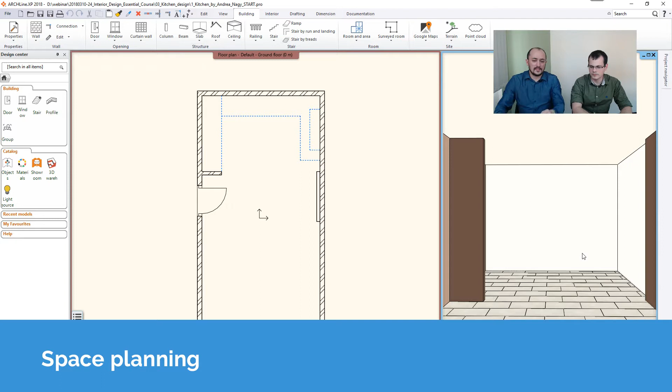What you have in front of you now is the 2D and the 3D developing continuously. Whenever I change the 2D, I will see what happens in the 3D, and I can swap the two drawings by simply clicking here, and they switch sides. If I click to the 2D and use the same button here, I can switch sides again. Sometimes I will use the full screen, which is by default this button here, and this way I can go back to the previous view.

And there's a shortcut for that which works just as fine. It's F2, and that allows you to go back and forth between the full screen view and the split screen view. So these are the things that I will use besides the regular zoom in, zoom out, and of course panning the content.

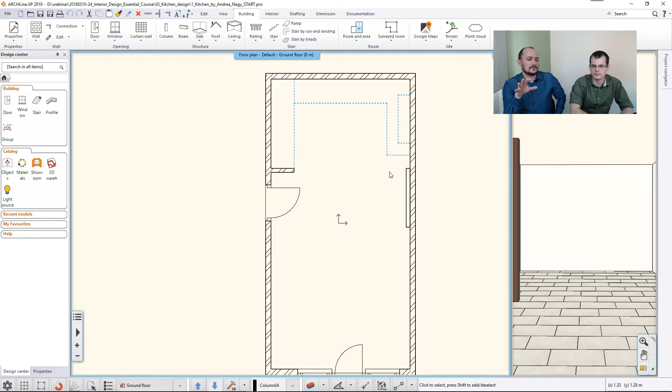So what do we do now? This content already has a few guidelines here. These guidelines will help us. They are not necessary at all. They are just visual clues for us to see where we will work, these blue lines. So I will start creating these furniture units here in this row, and then we will expand this content. If you have Archline and you can see the interior ribbon, that's where you will find all these tools.

Creating a unit is via this KBB menu, and this allows you to create a cabinet. This cabinet is basically a base unit, but you can customize it and change it to anything else. The software also comes with a built-in library of items. This is not the full list, just a quick list of items. You can find something here, pick it up and customize it. Sometimes that's the quickest way of creating something. But there's another way around, and this is where I will start now.

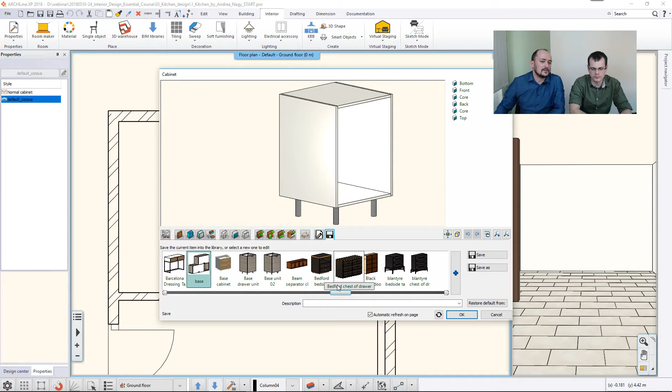In that case, Archline generates a dummy, which is a starter set of a cabinet. And then you go to the first page, and this is actually a tray of possibilities that we will use during our session. Pretty similar to the room maker, what we used in lesson one. Yes, that's right. So you can go through these things. You don't have to set up everything here. You will always focus on the one that's necessary for the current furniture.

Let's go through the basic settings. First things first, of course, you need to set up the width, the depth, and the total height of this furniture. These dashed lines are helpers to understand how that measurement, that width and depth, changes the item. If you change the depth, for example, see I'm changing it to 0.55. I'm working in meters, but you can change it to anything else.

So if I change that and I click on update, the software updates the size, and now it's a little bit more shallow, and it's always from this point to this point. So it's the depth of the unit itself without the door. Yes. The door, based on our setting, will either extend the size or will not change the size of the full furniture, but that's a decision we will make when we add the door. It's a later session.

So now we set up the width, the depth. We also set up the total height. I think this should be 0.85. You can change the carcass height as well, and you can change the space for legs. Even if you don't have real visual legs, it's advised to set this up. Later we can make these disappear if it's a wall mount base unit, and still we need that because the space will be used as a gap.

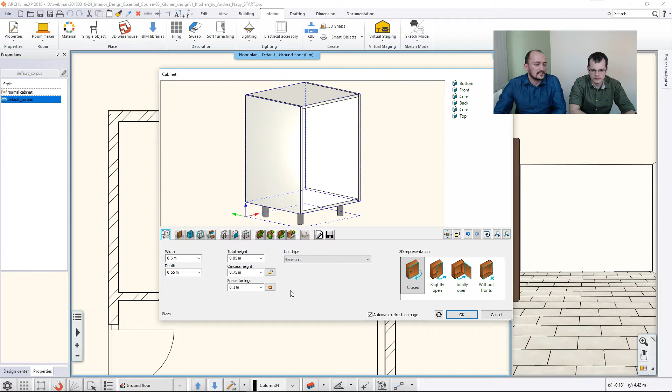Now, this lock is also something that I should talk about. It's locking the space for legs. That means later when you place this item on the drawing, you are able to stretch it sideways, backwards and forth, and you can even change its height. So if the leg height is fixed, then if you change the full height of the unit, only the top part will be changed. The legs won't stretch; they will keep their height. It's not that the whole model is going to be stretched. The leg is going to stay the same proportion as it is.

So if the plinth size, the decoration gap size, is the most important for you, then you can lock it. At this phase you can say, okay, this is what I will have to keep because all my units have to share the same leg height. Or if it's the other way around, if it's some sort of furniture where the unit size is the most important, then the leg can be stretched, then you can unlock this. But by default, we keep this locked.

This is the unit type. It's also important for two reasons. One reason is at the end, when we are finished with this kitchen design, we will make a quantity takeoff listing, an Excel file, a schedule. And in this schedule, the software will collect units into groups based on this setting. So base units will be in a group and wall units and so on. So this will be kind of a helper to digest that data.

And on the other hand, when I'm placing the units on the ground floor of this floor plan, which you will see pretty soon, the software will listen to the unit type. It will check whether two units which I'm placing close to each other are the same unit. Are they sharing the same height? And if so, then it's matching them, how to snap them together. So it won't let them overlap each other. They recognize the boundaries of each other. Yeah, it's easier to work accurately. Yes. So I keep it as base unit, and then I go on.

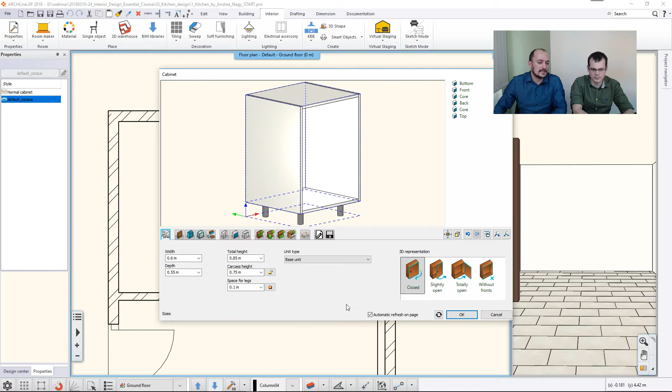These values, we will work with them later, but it just makes no sense yet because there's no door to open. So we will come back to this place later. There's the second page, which is about the unit front. Now, in case of designing this kitchen, I will use this unit family.

You can actually design your own unit fronts or own unit families. These are sets of items that the software will automatically select when you decide to have a front, whether it's a door, a shelf, or a drawer front. So in that case, the software will use this front. In our case, it will be this brown item.

And also here you can set up what sort of handle you would like to see at the front of this unit. This is also a library built in the software. So if you go there and you go to the libraries and you type handle, let's see what sort of handles we have here. These are the built-in handles in Archline.

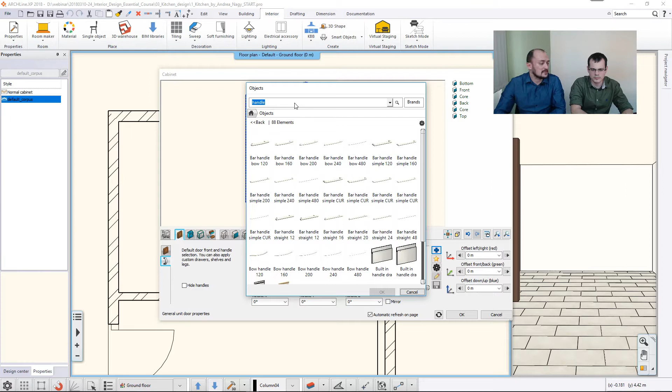And also if you download objects, you can use those objects, and you can actually design objects. There are many tools, for example, the loft, the decoration profile, stretch profiles and rotational solids. Create your own. Yes, which allows you to model your own things, or you can just download an object, explode that object, take one handle out of it and then just throw the rest if that's your intention. So this library here allows me to select something.

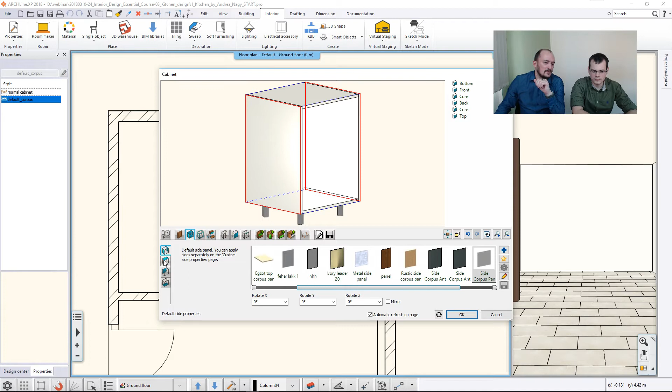I think I'll go with this, and the third page, this is where you determine how the unit anatomy is in action. Now the side panels are actually white panels, which in my case is just fine. But if I would like to distinguish the top panel for any reason, because for example on top of this we will use a worktop. So you don't need the top of this. Yeah, and I don't need the top of it. At least I don't need a full plate here. It's just a waste of money to use that.

So I just disable this option here because I don't want to clone the settings of the side panel. So instead of cloning it, I disable it, and then I can determine a custom panel. And this is the top corpus panel. This is something that the software offers by default, and then you can just say you would like to use anything else. The same happens if you set up the back panel.

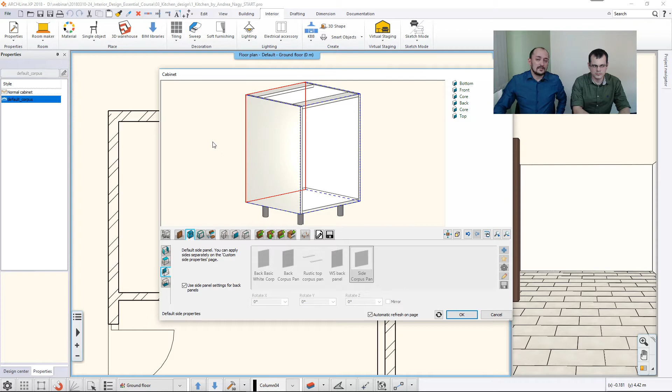The back panel, again, in this case, if you click here inside and click and drag the content, you can just rotate this model. And as you can see now, if it's not a freestanding unit, it could be a waste of money to use this thick panel. You could use another kind, maybe a thinner, cheaper panel, or you can just skip this panel at all. So you can say that you don't want to see anything.

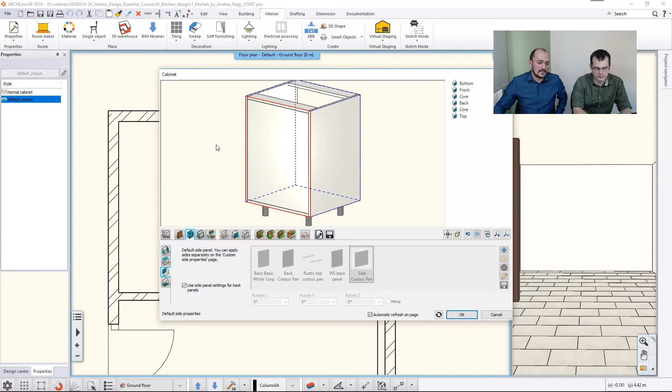Now again, I just disable this option. I don't want to clone the side panels. Instead of that, I would like to use a basic back panel or something else that I'm about to design now. So, okay, the bottom plate is fine, and everything else is set up. So now we will quickly jump to the doors. Later I will describe all these as well. Let's jump to the doors now, and I would like to add a door.

In case of adding a door, you can decide the door layout. You can set the door overlay, whether it's full overlay or traditional. And also the software highlights the area where the door is going to be added. Now if you add a door with the current settings, then it would adapt to the overall dimensions of the cabinet, right? Yes, so if I'm doing that, then it's covering the whole unit. I will show you soon how you can make this different, but for now I think it's enough. Let's see what else we can do with this.

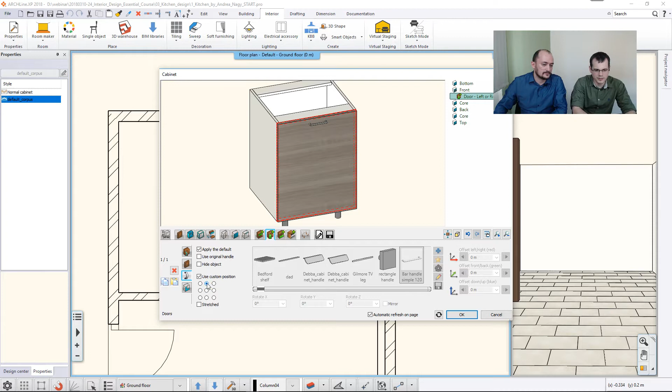I think I would like to change the position of this handle from the side to the top. As you can see, these are sub-pages of this page. The door setting page has 4 sub-pages, and one of the sub-pages is about the handle itself. And also you can just select another handle, which in a complex unit would be meaningful. But now I just would like to use a custom position. Instead of this default position, I would like to use this here. And in the middle. That's right. Or anything else I can select from here.

And let's say I'm satisfied with this, and at the end I can save it to the libraries of this software. So what you are doing now is defining a base cabinet that becomes your sample project. Yes, this is something I can intentionally do because it's a time saver.

I already set up what sort of front panel I would like to see, what sort of back panel, top panel, and so on. I already made many decisions that I don't want to do over and over again, so it's worth saving this.

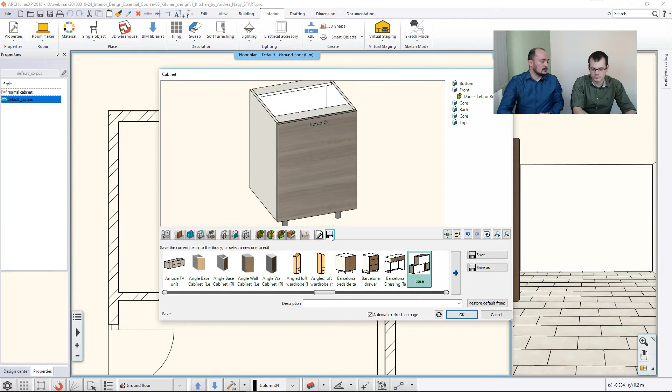Now I click on Save As, and say this will be webinar base unit 01, saving it into the kitchen library and the base cabinet subcategory. And if I'm remodeling an existing unit, I can also set up the producer and other BIM parameters if needed.

Record, article number, description, and so on. I can even add my own parameters. So let's say I'm done with this unit. I click OK, and from that point on this goes into the library, and I'll be able to pick it up.

I would like to use this, and I'm about to place it here. See, it's automatically snapping onto the wall where I'm positioning my mouse, and I just place it here. Then I can simply go on and the software snaps them together because it understands.

You cannot overlap them because it understands it's the same kind of base cabinet, so they cannot overlap each other. You can just put them down in an array. They auto snap to each other, which is very helpful for not making mistakes.

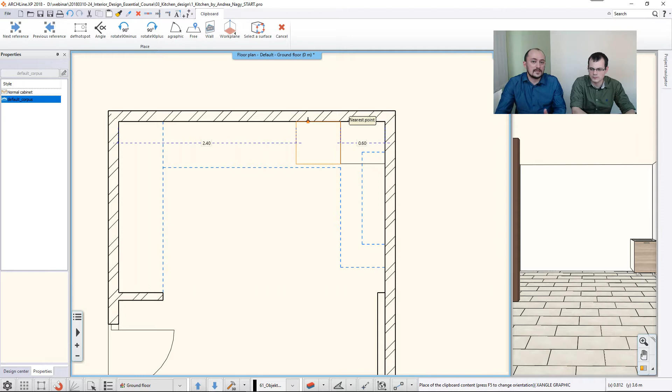Of course, if for any reason I would like to overlap them, I can move them somewhere else later, but now it's a useful thing. So let's say I place 5 units here, and then I'm starting to customize them.

One workflow is that you build a unit, place it down, build another unit, place it down, build a third unit, and so on. You repeat these steps, or you put them all down and later modify them one by one. This is what I'm doing now.

It's kind of a conceptual design, and I'm customizing the units because I would like to see the same front, the same layout, just the inside will be different. So what I'll change now is this center unit, which I'd like to have with a similar front.

Instead of the door, which I'm about to erase, I go to the door page and see it's highlighted in red, meaning it's existing and selected, so I can erase it. This way I get rid of this front, and then go to something else, like drawers, where I have options to set up.

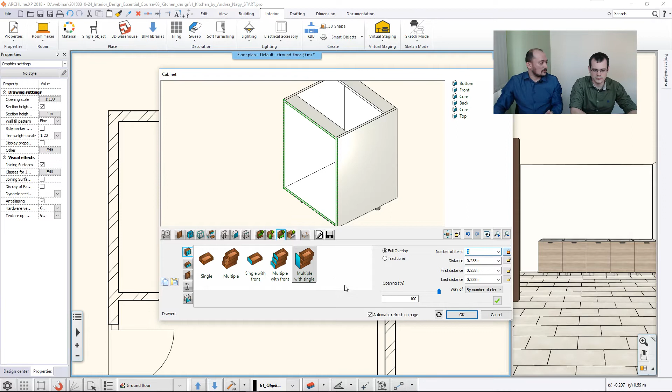For example, I'd like to have 3 drawers based on my selection here, and I'd like to have a full overlay single panel covering all the drawers. Then I click on create.

From outside I have the same layout, but when I go to the first page and open them slightly or fully, that's the difference. This is how it operates, and the other door, if opened, would have this hollow unit inside. So now this is a different unit.

I close it, and again if I want to, I can save this unit under another name. Now be careful: if you use an existing unit as a basis of your changes, take care not to save it and override it.

Overwrite it, that's right. Instead, use Save As. If you make changes based on an existing unit, make sure you don't overwrite it, because that could cause some surprise. So let's say I'm done with this again, I'm not saving it.

Okay, I'm ready with this unit. This way you can customize and build up new units, even for extreme cases. Here I'd like to erase this completely and add a longer unit with specific settings, because this will be a corner unit. It should have one part which is fixed where there's no door, and another part with a really working, actual door.

One option is to remove this and go to the libraries to set everything up completely, but I'd like to show you something new instead: going into the properties to change the size.

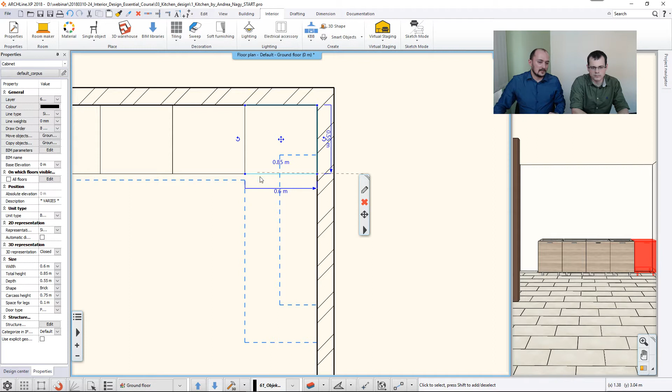This unit will be facing this way, so first things first, I rotate it so its door faces the proper direction, as you can see. Now you just resize it or stretch it.

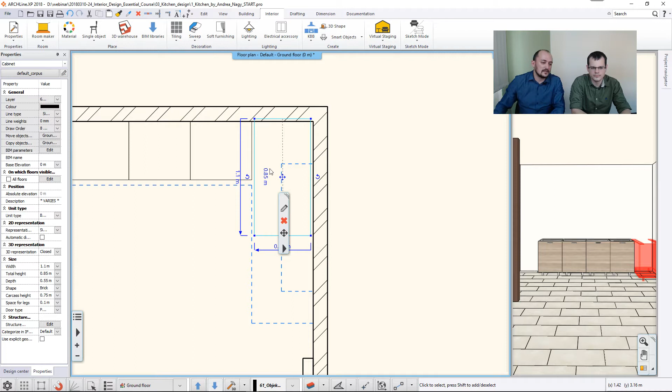I can resize it by clicking on its width value. I already know the unit I want has a width of 1.1, so I just retype the value, and when I press enter, the unit is stretched. Now it's not in the proper position because of the rotation, so I click here, click on move, and snap it to the corner point. This way it's in the proper position with the proper size.

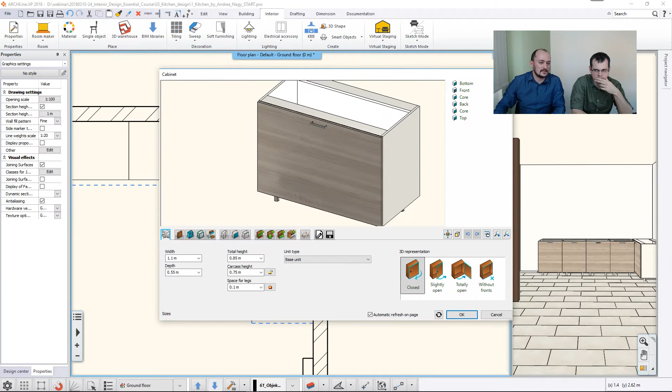The one thing that's not correct is the door. If I opened it now, it would open into the others, because there's a full door here. Let's check that—if I go into the settings, you see this is the unit, and when I open it, the whole front opens, which is not what I want.

I'd like to split it in half and make one part fixed and the other part only operable. So I close this back. I already erased this door, and I could go find it and erase it again, but let me show you a shortcut: if you click on a door while holding the Alt key on your keyboard...

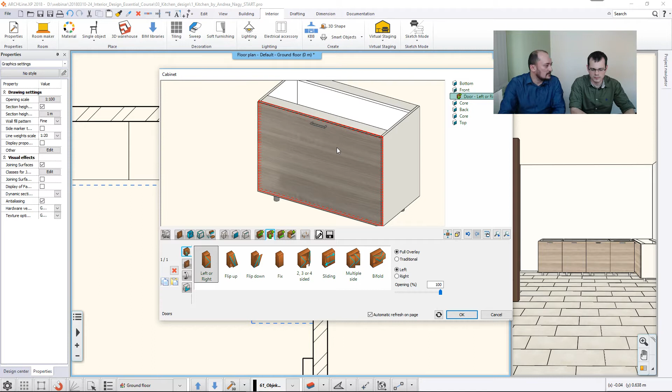...the software jumps straight to that unit part, so you don't have to search for it. This could be a drawer front as well—it recognizes the particular element and jumps to the place where you can edit it. The same happens if I alt-click on the side, the top, or the front. The software jumps right to that unit part and lets you either change the layout or completely remove that part.

Now, this part here, as you can see, is one whole—it's highlighted in green, meaning it's not divided. If you'd like to add any visible or invisible division, just a logical division, maybe you want drawers on one side and an openable door on the other. So how does that work?

This is the first page. This is the dividers page, which lets you set up a vertical, horizontal, multiple, or even custom-shaped division. When you position it at 0.5 from the right and click create, the software will divide the unit.

This is how it works by default, but I don't actually want this panel here. I'd like to be able to reach this part of the unit when I open the door, which I'll place here, and cover this other part with a fixed panel. So instead of using a shelf, which in this case is a vertical divider, I should use only a division—a vertical division.

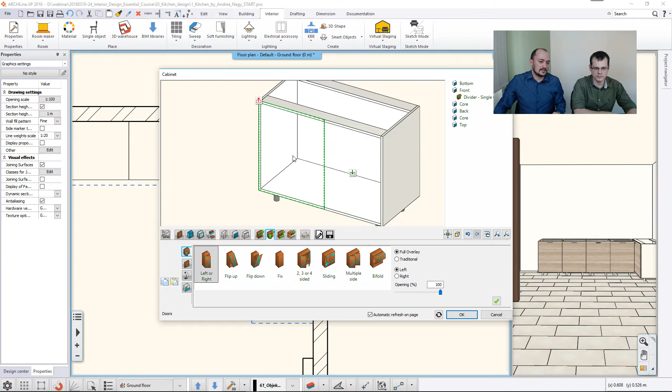This only sets up two sides, and then I can go to the doors page and select one of these zones. I select this zone and tell the software this part should have a fixed door that never opens, then click create, and the software creates that. I can then go to the other side and add a door that opens to the right, click okay, create—and I can change it the same way.

I can change how it has its handle. Also, something I sometimes cover here is that, well, this unit is nice, but because no one ever sees this panel, it's kind of a waste of money to use this expensive panel here. So what I'm doing now, I alt-click here.

Now it's telling me that this is a fixed panel, which is fine. But on this sub page, I'm about to disable that. I don't want to use the default setting. Instead, I would like to use a white front, for example. That's a cheaper panel, and it also works fine.

Okay, let's say I'm done. Again, I just do this same step, but now I would like to have a unit with drawers, with three visible drawers in the front. So I already have a unit with something similar, so I just make a copy of this, move a copy.

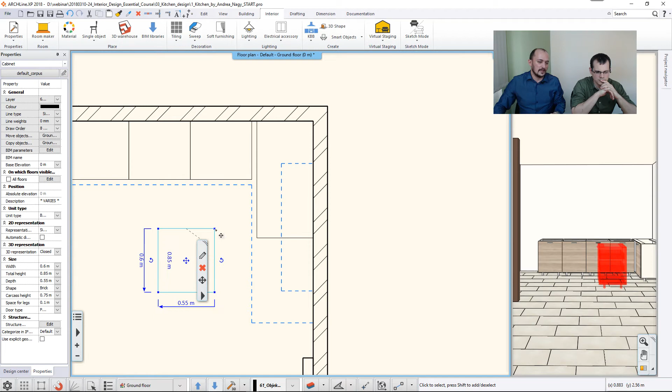Also, I'm rotating that 90 degrees. Then I'm picking up the corner, saying move it here. And again, if I know the size, I could click here and just change the size.

But if I don't know, but I already have some visual clue, a wall corner or something like that, then I can click on the side and say change width. Then graphically I can move my mouse someplace and click there. Now it tells me it's 0.8.

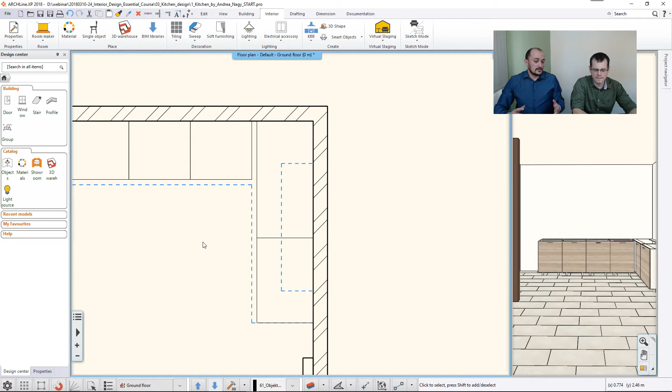So that's also something useful. Either you know the width and you type it, or you visually change its width, depth, and height the same way. Now let's just go deeper into the settings and change it.

This is a unit with 3 shelves. Just the front you want to have is not a separate shelving system here. So I'm going here and saying that this is one with multiple fronts, and then I go and set up the number. It's 3 now. And I can set up the distance.

The first distance is the top distance. That's actually the gap between the top and the division. And this should be, in my case, I think it was 0.15. Maybe a smaller one for the cutlery and the bigger ones.

Now I can change other values, but when I say okay to create, the software places it there. As you can see, it will place the unit as I left it out. I decided to make it open, and now it's open in the 3D. If I go back to the settings, go to the first page, and close it back, it will close it back in the 3D as well.

So it's not just a visual design tool. This way you can literally open them up and close them the way you want, which is very useful if you'd like to do it with multiple selection.

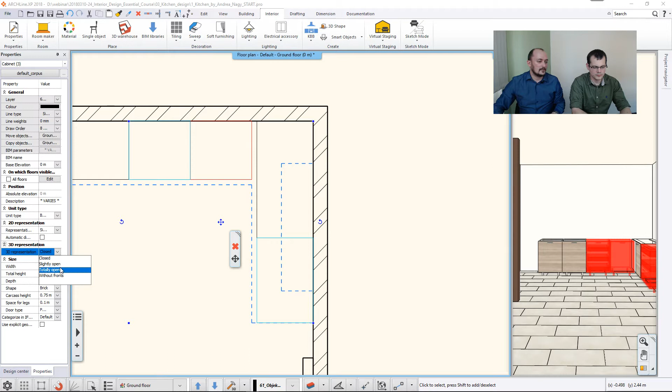You can actually select 2 or 3 items, and then at the left-hand side, see there is the 3D representation, and here you can make them all totally open or all totally closed, and this will result in a view like this.

Now let's just undo that. I think I should raise one question from my part before we move on, because I think this applies for the cabinets. We are going to talk about appliances later on, but what happens if you want to turn one of these cabinets into, let's say, a dishwasher?

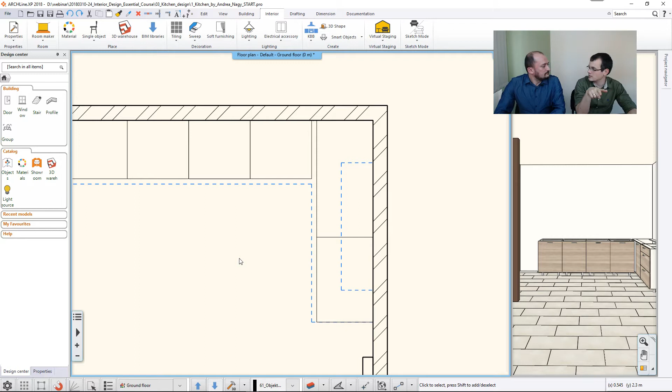Well, one way I could do that is go to the settings of a unit, and there was this page with the appliances. There is also a dishwasher unit, a built-in oven, and so on, where I could determine where it is, what's the size, and so on.

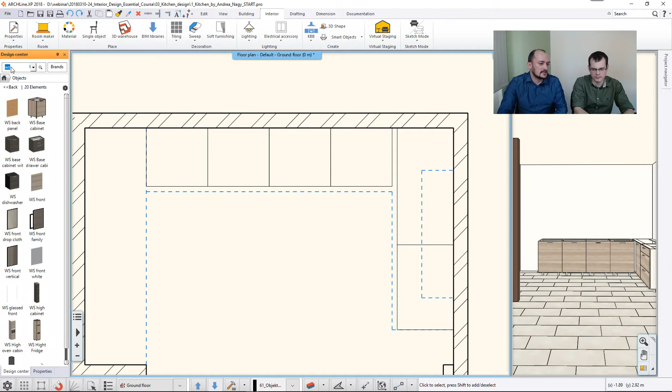But actually we already have a unit like that here. So I will now just go to the object library and search for units. This material that we use today is part of a workshop, so I will use WS for workshop because these are part of that project. I actually have a dishwasher unit which I can grab and release, and then place anywhere on my drawing.

If I do this, releasing it over an empty part of the page, then I can create a new unit. Now I hit escape because I would like to show you a trick.

If you drag and release it over an existing unit, an edge of an existing unit, then something different will happen. This way you can actually replace that existing unit with the one that you have selected. Now you can say that you would like to keep all the dimensions. All you want to do is just to change the unit. So whatever the original unit size was, use it here and change it to match this existing unit. This is what I'm doing now.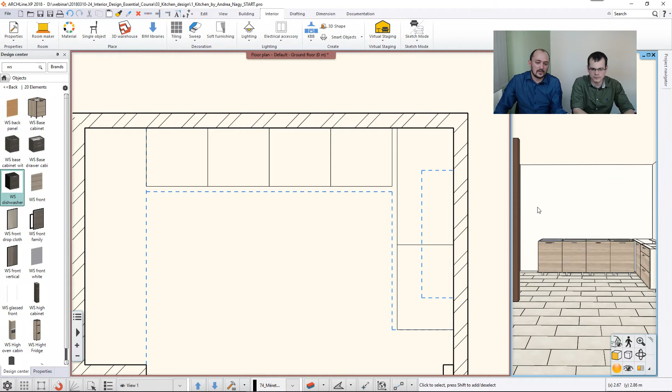And what we see, it's not that much of a change, but if I zoom in, as you can see here, now this is a different unit. Or you could also open it and take a look inside. Yeah, let's just do that quickly. So this is how it looks now.

Perfect. So what about worktops? How do we position them? Do we have to sketch them manually and then overlap them on the cabinets? Yeah, well, there are two ways you can create the worktop. One is that you use this countertop by cabinets. This allows you to select cabinets, and it's a good thing when you have a continuous row of things. But now I actually have a gap there, so I would like to use this countertop by profile.

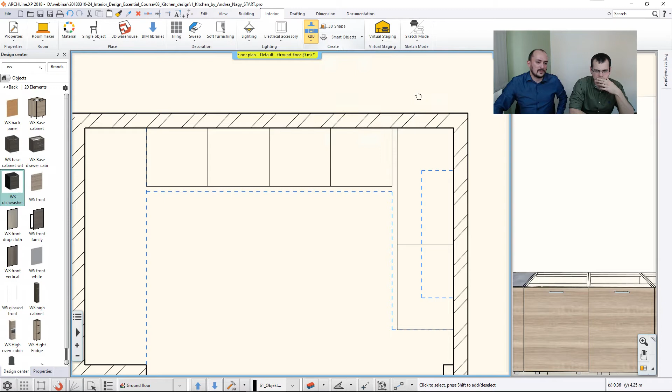And this way I can actually design the path of this worktop, which is good in this scenario, and it's also good when my worktop is overhanging my units, so they're not fully covering the whole layout. I can click there and then I can create an L shape or something like that. But now I'm just hitting enter to tell the software I'm done. And then the software recognizes all the units, and it uses those units' wireframe view as a guide to set up where several parts of this worktop should be.

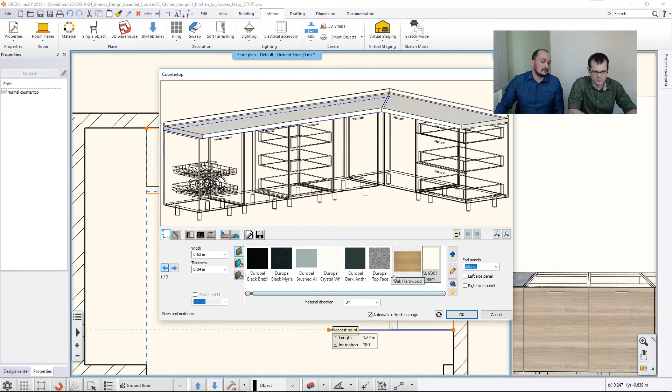Now this worktop is at the same position, so it's fine, but if for any reason it had the wrong position, I should go to the last page, and that's where I can change its elevation. So you can elevate it a bit. Now, I can change the main sizes of this, the width, the thickness, all these here. Of course, I did not mention that you can also change the material of it. You can go to this page where you can set up the joints of the panels.

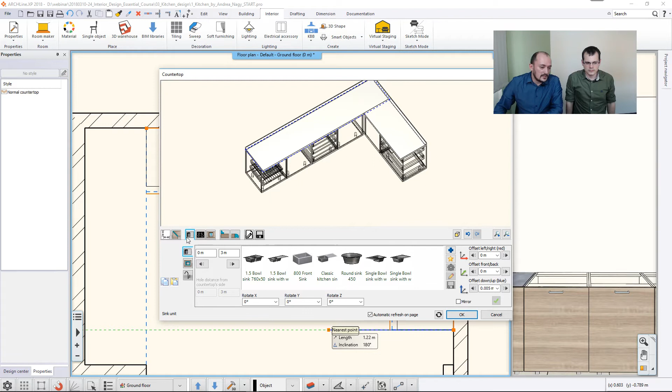Now I have two panels, and as you can see, they are equally connected. There is no stronger element, and I can change it to either this layout or this layout, or maybe no joint. I think I will use this, and then you can go forward and select objects such as a sink or any other unit here. This page with the sink unit allows you to select predefined items. The software is shipped with these, or you can also go to, for example, 3D Warehouse or the Sanitaryware module, and download additional items, and then use them just the same as I do here.

When you select a unit like this here, you're telling it where it should land initially; this is the selection here. If I click here and click create, it will be placed somewhere here. If I click here and click create, it will be placed somewhere here. How do we control where we want it? When I place it, the software usually places it at the left side. It centers the unit center and the edge, and from there you can either use this button to move it, or I can type a value. I know it's around 0.8 where it should be.

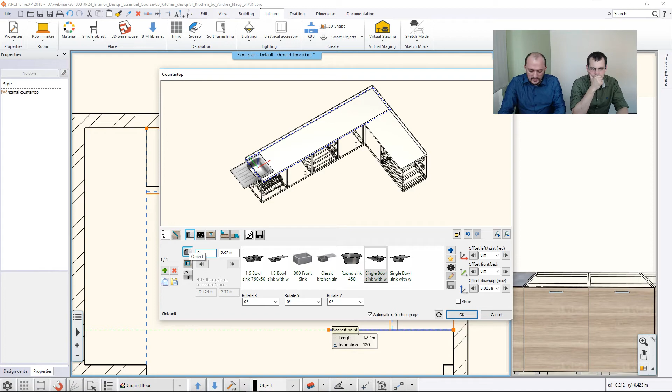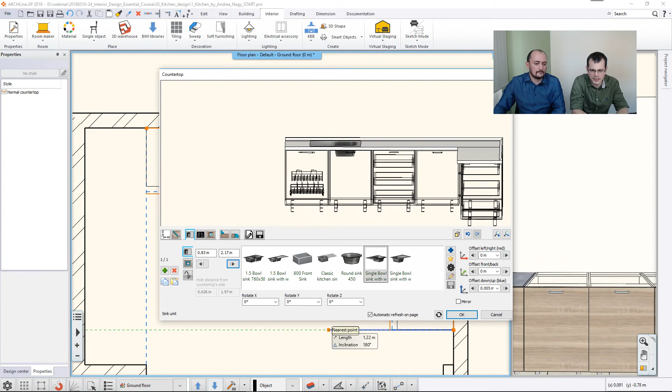Let's click on update. Well, it's not that bad, but I should move it a little bit to the right. So I just click a few times here, and then I check the front layout. Maybe I should move it a little further, but that's how you can position it. Yeah, so visually you can position it. That's very helpful. Then you can also add a kitchen tap, which is here. This is a default object, but again, you can download objects and use those objects here.

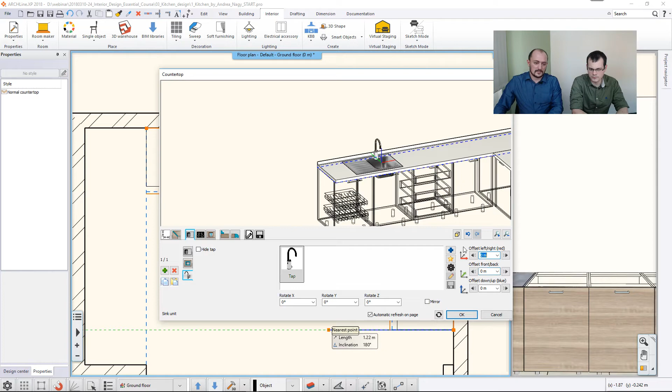The point here is that after you place that unit, let me just zero this out. This would be the default position of it. And actually, I just zero these values out as well. So it would land somewhere. And then you can decide to either rotate it, and then see these axis markers in the main axis. This is what you can find here as well.

So if you see that you should move this unit to the left along this red axis, you can just, again, either use a value here or just visually tweak it. The same way I can dial up this green direction here. Perfect. So that's how you can set it up.

How about we add maybe a cooker or something on it? That's with the same method in mind. You can click on the hob unit page. You can decide where you would like to make it land. I would like to place it someplace here. Again, you can select an object. I think I will go with this one, and then let's just create. And again, it lands here, but you can move it someplace else.

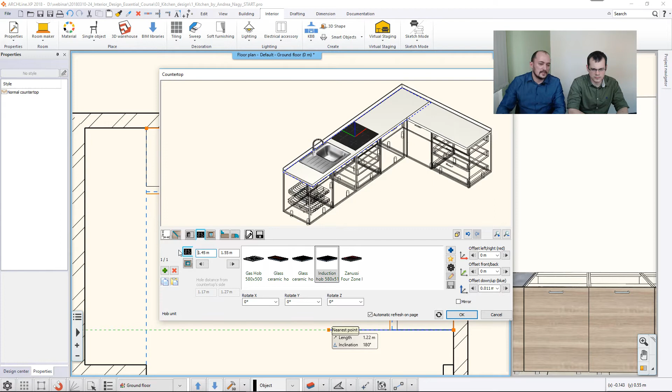Let's just make it 1.45. Let's see if I like that. Well, it's quite good, but I think I should move it a little bit more to the right, and then I think that's it. It's centered nicely. So this way you can add these to that.

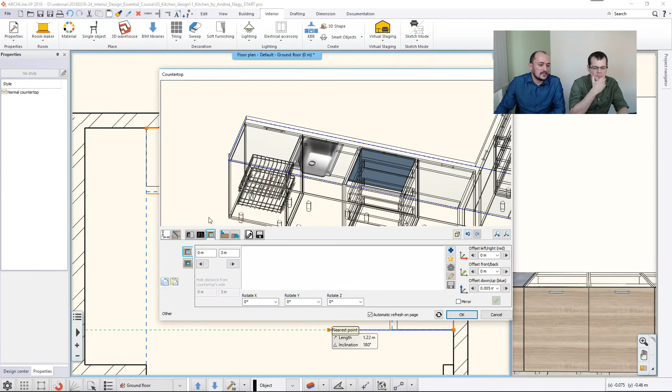One other thing that you can customize: these objects that ship with the software already handle this, but you can actually customize the cutout under them. So you can either draw the cutting contour, or, like in this case, you can set up an offset where the software should place this cutout. This fifth page here allows you to design any sort of custom cut, any place on this or this panel, and then also you can set up a splashback or a nose here.

I think I will use a rectangular splashback with a height of 0.4 and with a width of only a centimeter, like this. And then I change its material. Wherever you see something like this with a little paint bucket, it's always for the material. So I just select this. I think this will be something like a glossy surface, so I will go with this one. I do not use this nosing here, so I just disable that, but again, you can add any kind of cross-sectional profile you want.

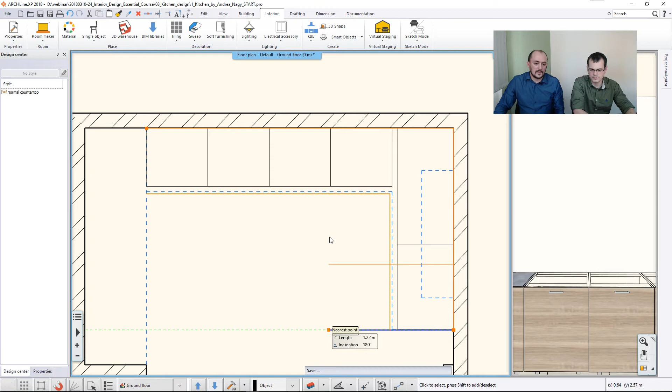And at the end, again, you can just set up what sort of layer you would like to see, what sort of contour color, and so on. And then you can also save this if you like this setting and you don't want to start from zero when you design something similar next time. So with this one, you can save it. So let's say, okay, I'm done with this unit, and it's built into the 3D right away.

And then what's next? Maybe there's something on the left-hand side we can still add. What we did not cover this time is, I think I will change the layout a little bit so we can see that better. Here there are tall units. Now, the same way I have designed the base units, I can design a taller unit, I can divide that, place doors, so I won't waste time with that now. But what I would like to focus on now is some sort of difference that you can set up.

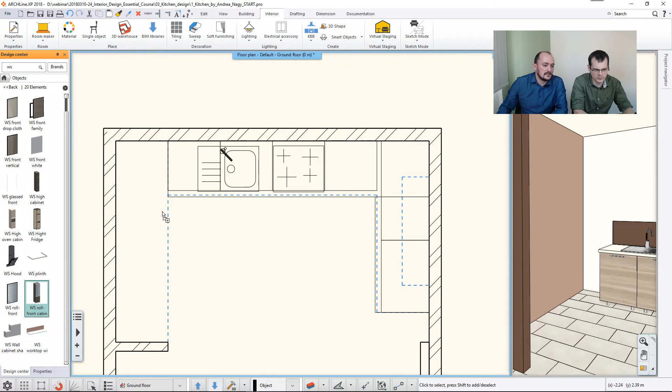So I actually just look for the same items, and I will just quickly furnish this part using, I think the first one is the roll-front cabinet, this here. Let's just match it. The other one should be this oven unit. There should be this narrow unit. These are all predefined, right? Yeah, these are all predefined. You can actually find these when you download any of our tutorial materials and install them. These will be part of the software right away.

And I think this is the last one that I should place here. And then I have this layout here. Now, if I would like to make some sort of variance here, and I don't want to use this wooden panel everywhere, but instead let's use a white panel or something like that, I can just drag a panel that I already have.

Either I just design or I just use the library items. I click here and I drag and drop this panel. Sorry, I double clicked on it. So I just drag and drop it here, and then I can use these options. Now I would like to use it as a texture or just the front. So you have the choice here.

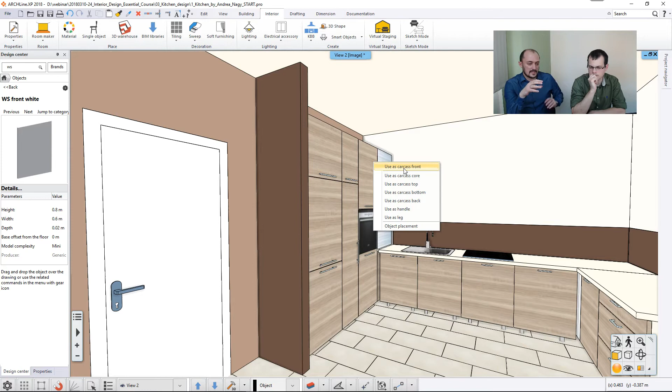Actually, that's a good question. This is not just a texture; it's a front. So if this front has a different layout, if it has bevels or something like that, then this is coming with all of those things. Now it seems like I'm just changing the carcass front with the material, but actually it's changing the fronts themselves. So this is what I do. Change this part here, and then I think I should customize this. But first things first, let me show you how this works here.

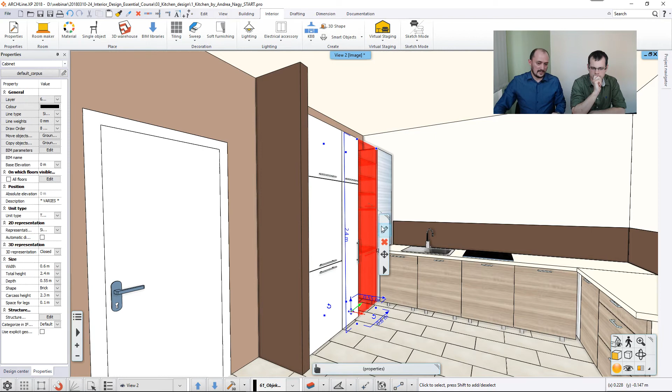If I click here, see, this is the page which I did not describe yet. It's the appliances. If I alt click here, this reveals that this was designed with the door, but you can actually go there and select a built-in oven, or any sort of other unit that you would like to build into this item.

So going back here, I would like to show you how you can use the divisions and create something even more complex than this one. Let's see. I'm going into the details of this unit. I alt click onto the bottom and I erase this. And then this existing part, see, now not the full front is green, now only this part is green.

First things first, how I can navigate through these. If I click on this button, which is a little arrow pointing up, it's kind of an exit arrow, I can go back to the first zone. Level, right? Yeah, so one level. Navigate between levels of details here. Yeah, if I click here again, I go back to that sub zone. If I go above, then I'm at the, let's say, parent zone. If I click here, I can go to the sub zone.

And I can actually change between the zones by just simply clicking on them. The difference is the color of their icon. The color red represents that I will go into some place where it is already divided or it already has something in it. And now that something is a door because I'm on the door page. So this here does not contain any door, which is very much visible here now,

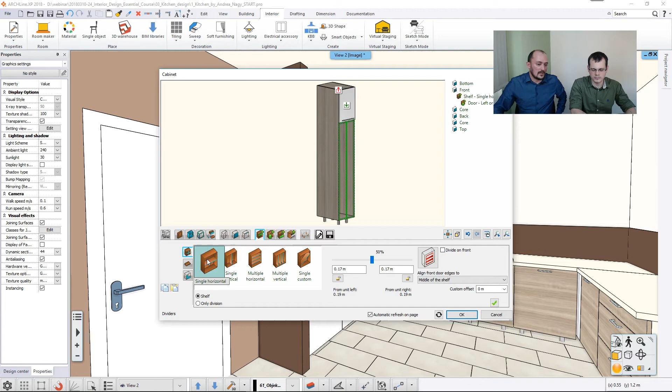but if I go here, I can actually divide it either halfway, or I can set up a value. Now this value, if I remember correctly, should be 0.28. Let's create a division. So that means this is measured here. So now if you want to create, let's say, a bottle holder or anything like that, then you are going to click on that section in the middle, right? Onto this one. And then you just keep on adding more divisions, right? Yeah, and I'm about to set up where it should be.

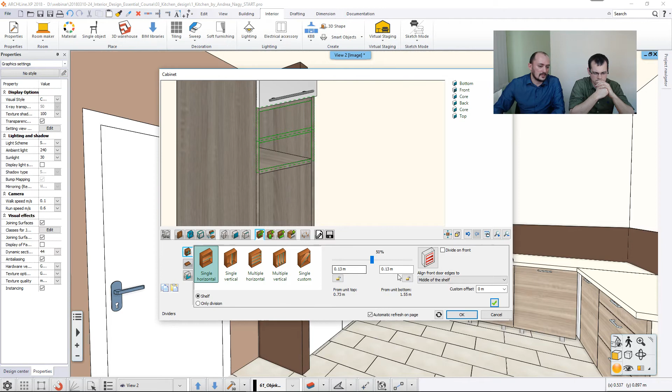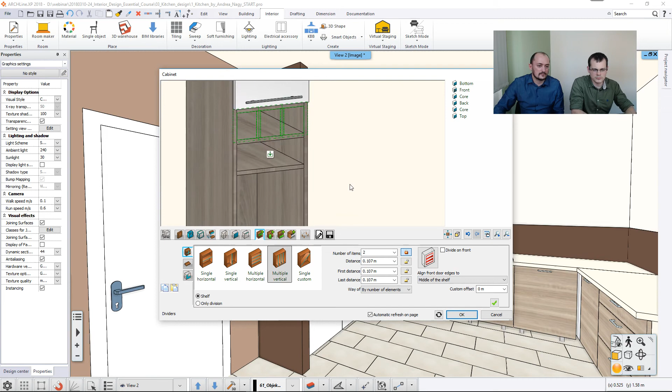I can either decide it with a percentage slider here, so that divides it half-half, or just as before, I can set up the value, and then I click here, and the software divides it, and then I can go to that sub zone which I have just created, and I can add, for example, multiple vertical divisions. Perhaps only 2 now. I think that's just prettier, and I just repeat the same thing over here.

So easily and very quickly you can divide the units into sub-units and sub-units and sub-units, and then using these navigators here, you can just go out until you reach the top, and then you can go down into the subcategory, into the subcategory, into the subcategory to do whatever you wish to do with them.

So for example, if I would like to place a door only in front of this part here, I can click onto this zone here. Going back to the door panels. Yeah, that's right. Okay. And making sure only this part is green, I can click create, and then I have a door unit here. So that's it. And this way I have a completely new unit based on an existing one, just with a custom division that I have just defined at the center of this part.

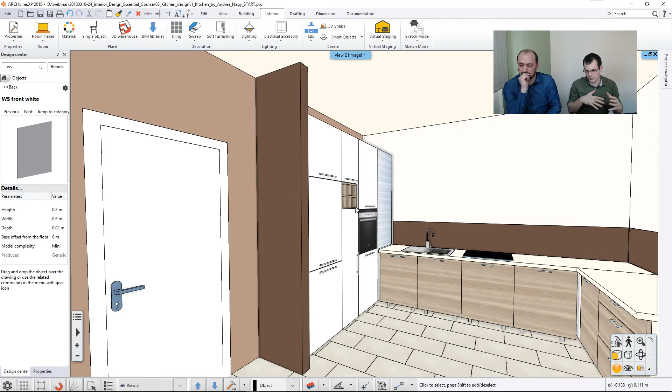What if you want to create something more customized? Now we started from base units, which we tweaked into something else, but what happens if you want to have a stranger, maybe L-shaped unit, maybe a wall-mounted shelving? How would that work? Well, in that case, remember we talked about the size of the unit, but that's only the size if you design a cubicle unit.

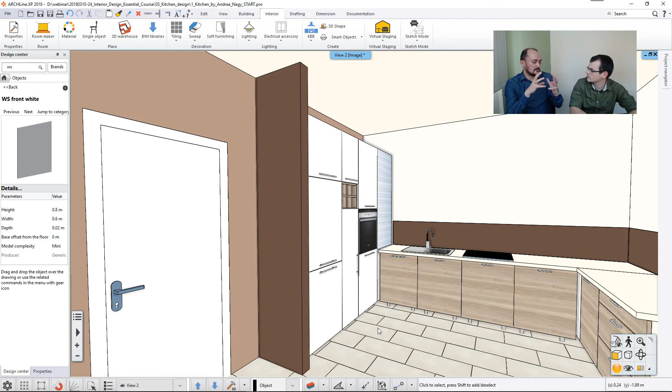If you go to the settings of a unit, let me just customize this here first. We did not discuss this page here. This page is about the shape of it. If I select this shape, see, it's just redesigning the unit, trying to keep as much as possible, and then you can actually go with custom shapes and pick up a shape like that. Or you can select something that you have designed. So let me show you how this was created.

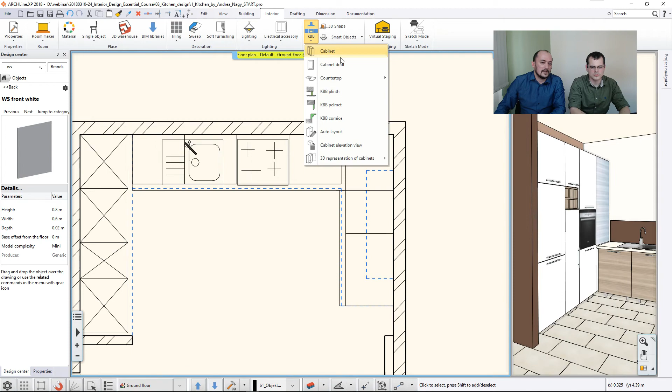So I will just say, okay. And then I'm about to design a unit here. Let me quickly measure the original size of this. Dimension, measure distance, and this should be 0.3, and I have space here for 1.2, and I think the height was around 0.8. So now I'm going to the interior cabinet, and on the first page, I'm removing the legs.

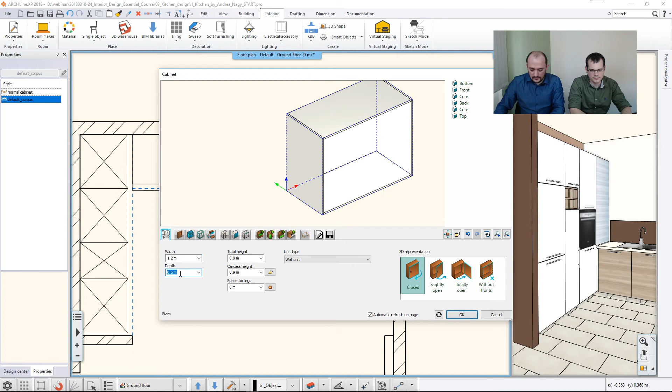And this will be actually a wall unit. Again, this is better for the calculations, to position it as a logical selector. The width should be 1.2, the depth should be 0.3, and the total height maybe 0.8, or we can even keep this original value. So this is still rectangular.

If I go to the shape page here and select custom, then instead of selecting this one, if you would like to create a new one that's not existing here, you click add object, and this 3D shape dialog comes up. This 3D shape allows you to set up an object with the basic size and the three main contours of it. The basic size will be the width, the depth, and the height.

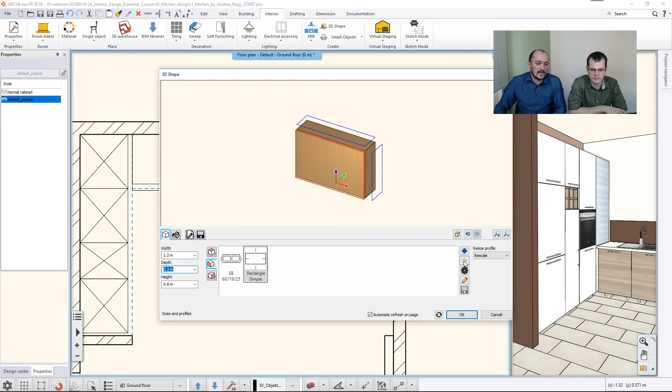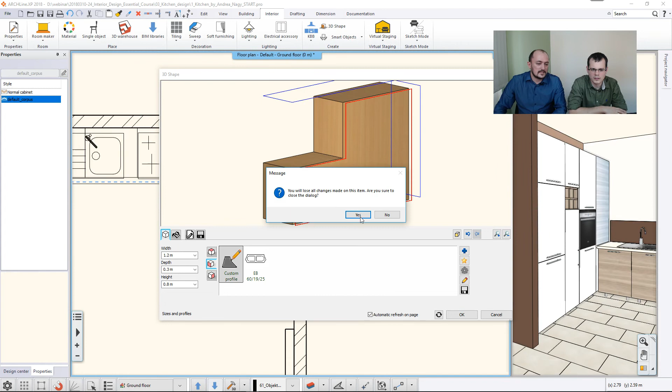The front shape should not be rectangular; instead I would like to either define my own profile, literally drawing a profile on the layout, or modify this one. I click here, and say, let's divide it here, divide it here, and move this part to here, and that's the new shape. This is how this shape was created.

When I select it, the software will apply the settings on that panel, and then I can make, for example, a division, because here I would like to divide it in half. It's not exactly there. How do you position that? Yes, the problem is that, as you mentioned, this is not matching here. And why is that? There are two reasons.

First, when you divide something, you can either decide to divide the remaining part or the front, which makes it a little different when you set up these values. But the most important part is that I'm positioning this shelf with its center line. If I position it with the top shelf, then it's matching perfectly. I click create, and now I have something like this. Then I can again divide this here, I think this should be 0.4, and so on. From that point on, everything is just the same.

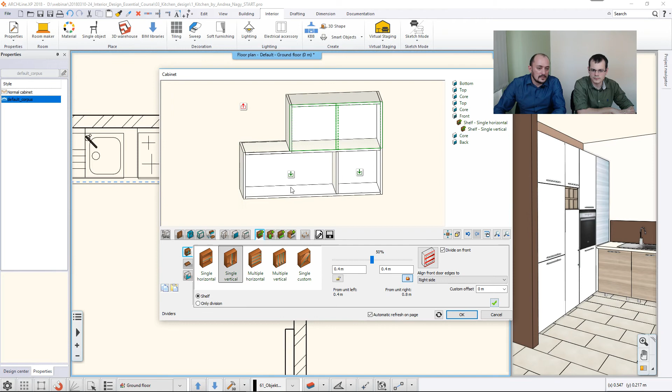Here I will add a flip-up door. Let's create. And here I'm adding another flip-up door. See, I have forgotten setting up the door front, so now the default door front is in action. What happens if I want to change this? First, I can just place it, find that panel, drop it over and change it just as I did here.

But here's the difference. Before you place it, you can do the same: select the same family, and this way do the same thing. That's good. Again, I can save it. I should not forget to set up the relative height. I think it's about 1.4, perhaps.

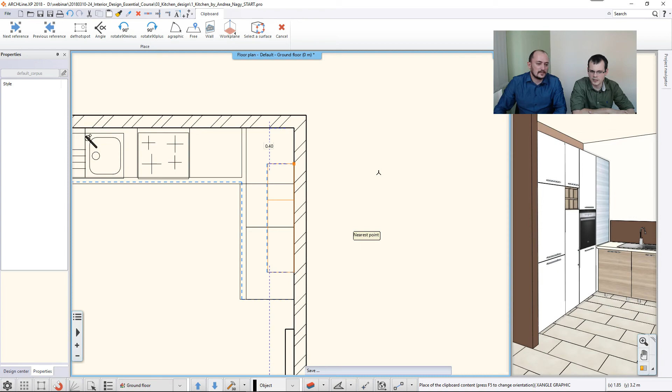And let's just click create, and then I'm matching it with the original drawing. Perfect. And like that. So perhaps now we want to maybe import a more advanced stage of this model, and let's see how the visual design comes into the picture.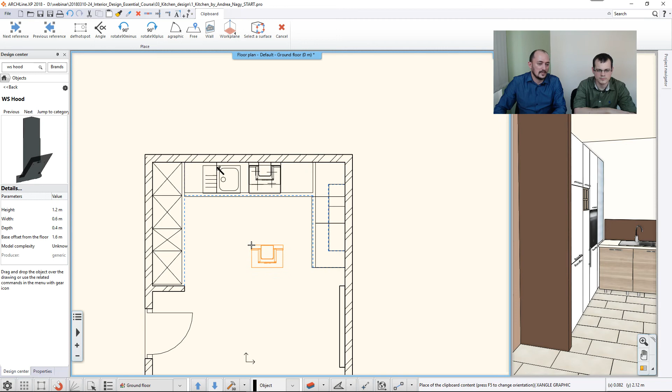So I can just click here and say, okay, this should be, I believe it's 1.6. So I will change it later if it's not fine. And then I click and drag it again, and now it allows me to place it on top of the unit. So now I have something like this. I see, perfect. So again, this could come from the 3D Warehouse or BIMobject or any of the other object libraries.

Yes. So what I do now, let's make a listing first, and then I will do the visual. Okay, so let's do the quantity takeoff. Yeah, I think I just would like to change the order now, because the visual sometimes breaks our webinar a little bit. It's going to be very demanding on our computer. Yeah. So let's do the things that we can at this point.

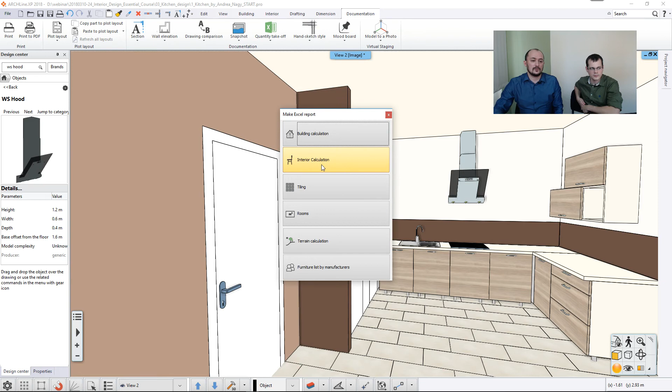So let's see how we can get some quantity takeoffs and calculations, because last time we showed that for the tiling, but what happens if you want to get the same kind of information for the cabinets? Now the cabinets are listed at the same place. It's in the documentation and quantity takeoff, and you should select Excel list. And in case of Excel list, you should go with the interior calculation. Now this allows you to select what sort of things you would like to list.

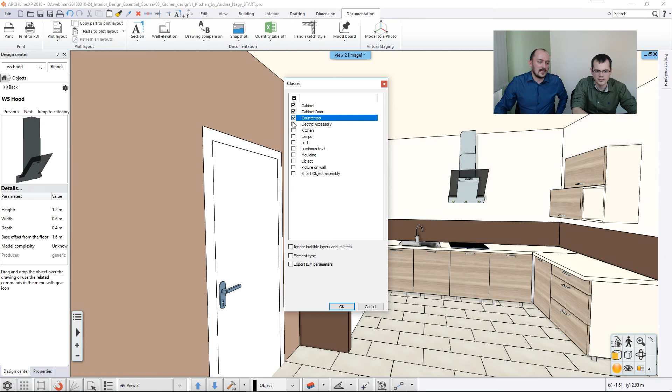Now if this would be filled up with any sort of other objects, you can list them as well. But now I'm about to focus only on the cabinet doors, countertops, and I will just skip the rest, because there's not that much now. And if I created things with BIM parameters, I can also enable this part here, and then I say, okay, let's go on and create this consignation, and this should be a consignation of a kitchen. So I'm just naming it accordingly.

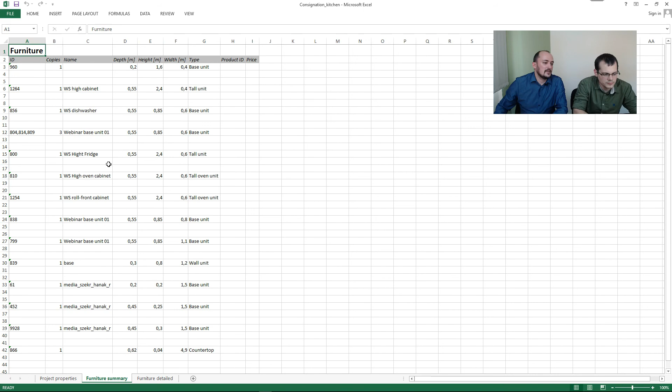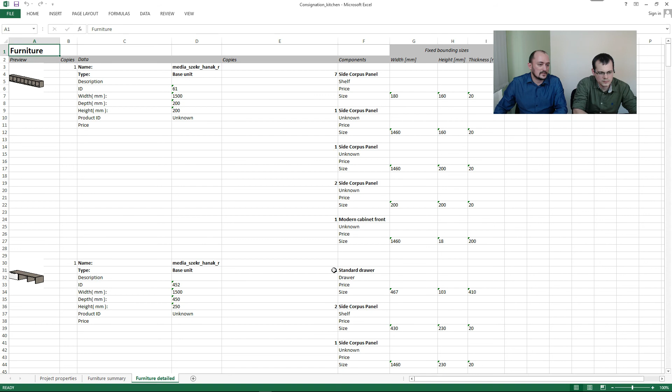And then if you have Excel installed on your computer, right away when the software generates the Excel file, it will open it up in Excel. First things first, you always see the project parameters. It's like a summary, and then you go to the subpage of the furniture summary, which lists the units, and then the furniture detailed, which lists the units with an image, and also with some details like whatever else I used here. So this is how you can make a listing of these units.

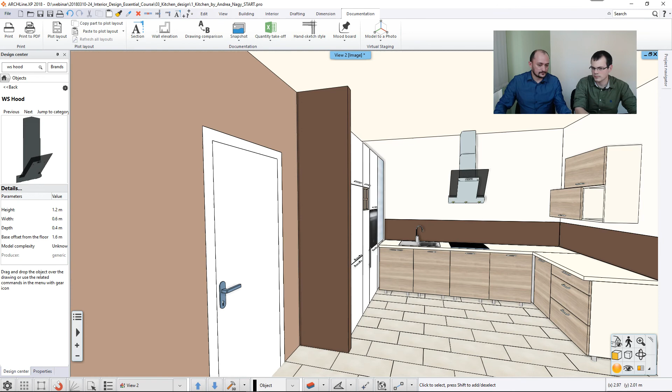And before I continue to load this final stage, let me show you one more thing, because I actually did not talk about that. When you design a worktop, you can still select it and go and select its edge and make it longer, for example. The same way, you can click on the unit and use this component mode, and then you can reach all the edges. You can actually do something like this. You can even round it off like that.

I see. This also works when you use the Alt key. Actually, if you Alt-click on a worktop, instead of the regular selection, it right away jumps into this component mode. And another thing that I wanted to show is the decoration, how you can add a plinth.

Now plinth allows you to select units like this, and it will actually generate plinths. You can see it on the 3D that there's already a plinth generated—actually this generated two plinths. So if I'm about to customize these, I can change its height, I can change its length.

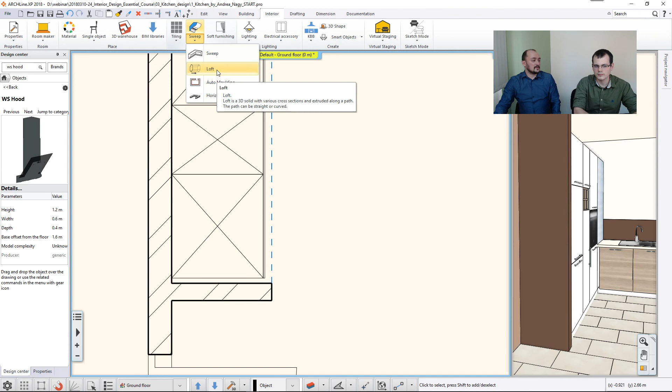I can click here and do this, change its length here, then click here and append a line to make a longer part, for example here. Or there's another tool which allows me to literally design the path of something, called sweep or molding, and the loft does pretty much the same. So there are several options.

Sometimes it's simply easier to select the existing parts, generate something, then customize it—move it a little more to the front, and so on—to customize the whole thing. Again, these are things you can do both in the 2D and 3D views. Use whichever is more convenient.

Yes. So let's now load the final version. Let's see a final version of this project and talk a little bit about visual design.

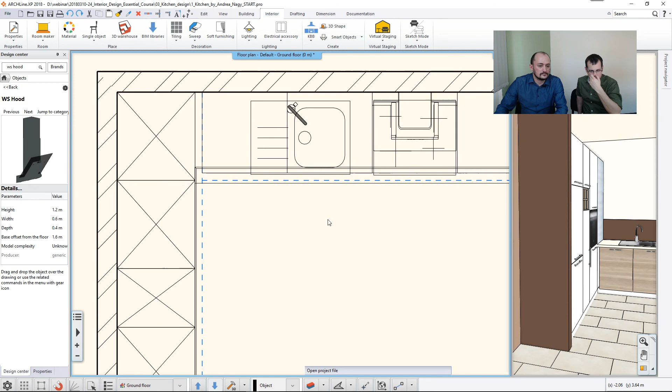One thing that comes to mind when working on this design is that if you don't want to work with all the elements, you can turn off the layers where they belong. I think that's what happened in this particular design, because the things we didn't need at that point were simply hidden, so we didn't have to work with all these elements you can see here now.

As you can see here now, this is a way more detailed version of this kitchen, with the dining area and the living room area already decorated and fully furnished.

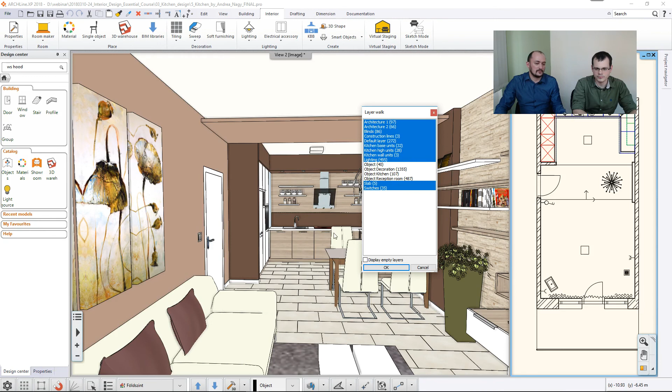What you can do on the 2D layout—I think the fastest tool is the layer walk, which allows you to pick up parts and decide whether they should be visible or not. Let me disable this, this, this, and this—see, they disappear here from the 2D, and when I hit OK and regenerate the 3D, they will disappear from the 3D as well. I'm just about to do a render as well.

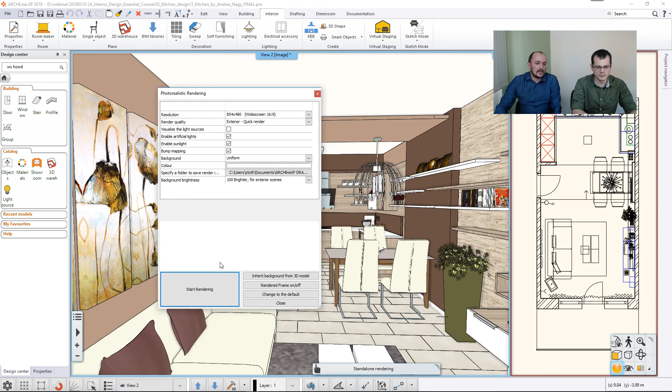Rendering is pretty much the same as before—you set up lights, you set up materials. We'll actually cover this part in the next session. When you're done with those things, you can create a rendered version. I'll keep it easy and go with a lower resolution now, but otherwise I won't change anything else. I'll just use a quicker renderer and click Start Rendering.

So while this is working, let's talk about what happens next time we meet. We'll look at rendering related issues—how to set up the proper lights, how to handle renderings, and most importantly, what the rendering result depends on. This is a very important question: how to set up your model, what the biggest factors are. We don't want to spoil it, but it's going to be mostly lights and material setups, though there's much more to that. We'll cover this part in detail.

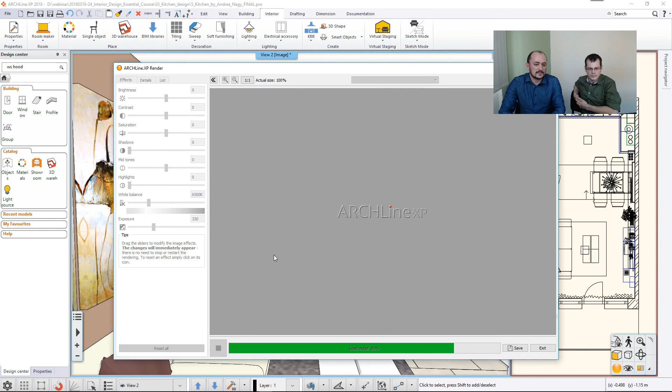Now I'm just about to show you one render, and I'll terminate it after a few seconds, because this is very demanding on the CPU—heavily CPU intensive—and we know the webinar sometimes breaks up the image. So I'll just hit stop now. You see this is the first few seconds of the final image, which we'll teach you next time, two days later, how to fully render.